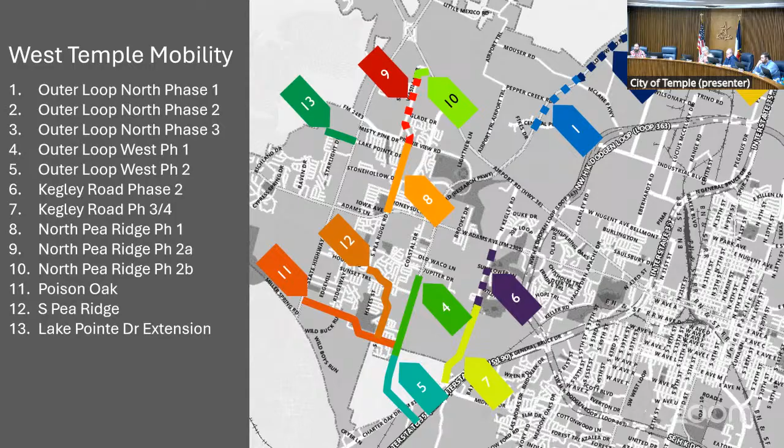There's a couple key ones I want to draw your attention to. Numbers 1, 2, and 3 up on the top right are your outer loop north—2 phases are complete and 1 is ongoing. We've got 2 parts of Poison Oak, that's number 11; 1 is complete, there's another one coming, so we're going to talk about those. Then future outer loop west on number 4 and 5 down to make that ultimate connection for the outer loop around the Dodgen Loop. This map gives you a good view of how that's going to function, giving you another option from 35 back to 35 when it's really congested.

So let's talk about the outer loop. This one has been a long time in the planning. The hiccup that happened with this is blamed on the railroads. Early on, it was going to be an at-grade crossing, but it changed to needing to be an overpass—for safety, they didn't want to have the vehicle and the train conflict. So it was recommended to change it to an overpass. They've done that, and as you see on the photo, the overpass is in progress.

These are photos that I borrowed liberally from our Public Works engineer's slides. So if you go out there right now, you're probably going to see more work complete than what I'm showing you here. They are moving.

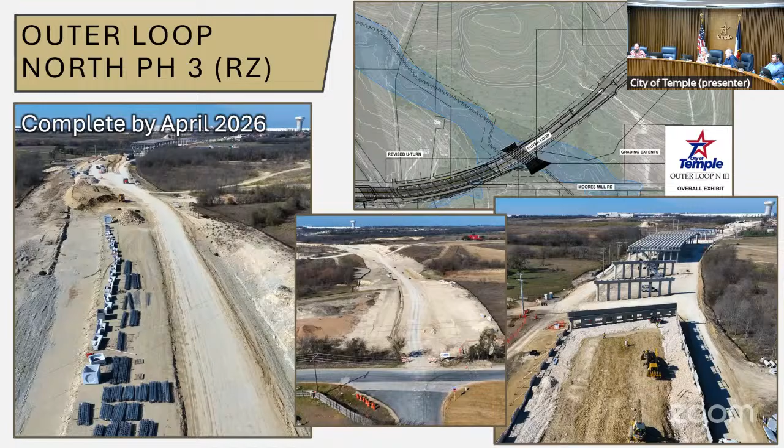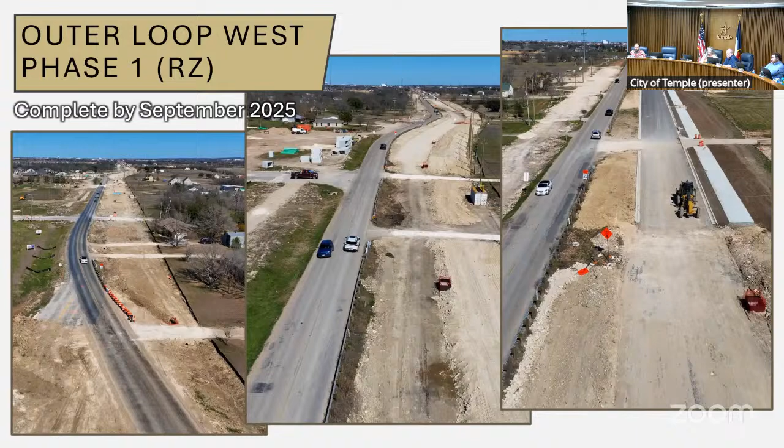Outer Loop West Phase 1, this was a grant that we got through the Killeen-Temple MPO. It's funded, and as the engineers like to say, they're blowing and going. This will be complete by September of this year. There is a second phase that will make the ultimate connection to I-35, and we'll cover that at the end because it's quite a ways out for now. But if you're familiar with part of Old Waco Road by Walmart and QuikTrip, it's the same cross section.

Kegley Road, everyone's favorite project, mostly Commissioner Rhodes' favorite. The new bridge you see there, as well as grading to expand that roadway to allow that future 3-lane, similar to the completed phase up closer to Adams, using that 3-lane center turn lane with the sidewalk on one side, marching their way to the south. It'll tie into Midway and Charter Oak, and we're promised it's complete by November. If it changes, don't blame me, because I don't dig or drive bulldozers, but that's the date they are showing right now.

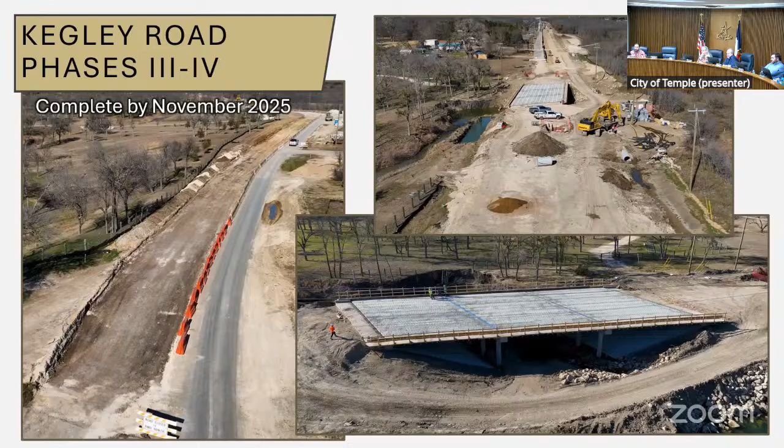Another bridge, the 24th Street overpass. If you listened to the last council, Rucker Preston is the director of Family Promise, and this is their facility right here on the corner of 24th and Avenue N. This was a pedestrian project, but once they started looking at the bridge, they recognized the need for improvements on the bridge itself. You see that inset photo where they're working underneath the bridge. So there was a great opportunity to combine two necessary improvements. They're moving along, and that should be done this spring. May 25 is what they're showing.

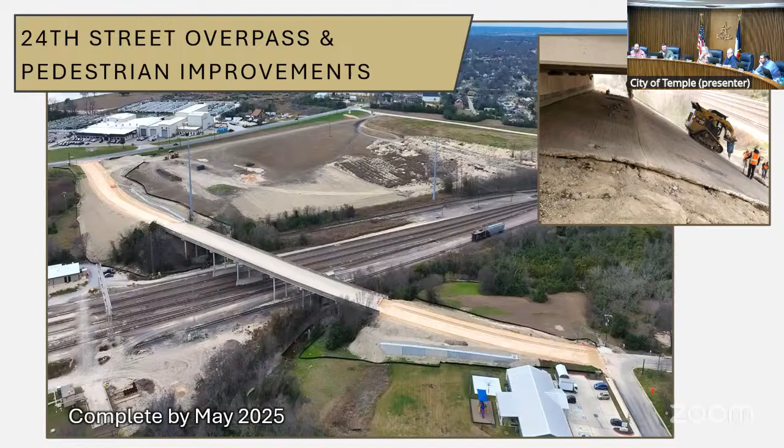Veterans Memorial Boulevard, this is First Street down there by the VA complex. You're going to hear a theme: extending the same cross-section that's down by Temple College, we're moving forward with the same cross-section past the VA, moving north. So it's that divided landscape median boulevard, wider sidewalk on the side. If you're familiar with the VA, that's a necessary improvement for the pedestrians and veterans who are out there in an assisted mobility device, classic wheelchair, or just crutches and sticks trying to get around. This is much needed.

It also includes a drainage component, which is on the other side of Temple College. You see that inset there, that's the future regional detention area that'll feed into Friars Creek. This one is going through final review with TxDOT, looking at the designs and getting their blessing, because it is a TxDOT facility. It should go out to contract, out to bid by September. We've got some congressional money on this one, and there's a shot clock clicking away, so we're working on getting this one out the door very soon.

Then there are 2 more phases, from Avenue U, where that CEFCO is, going north, and then R to O. The first phase is just for the congressional money. Phase 2 and 3, we got some more money through the Killeen-Temple MPO to fund that work.

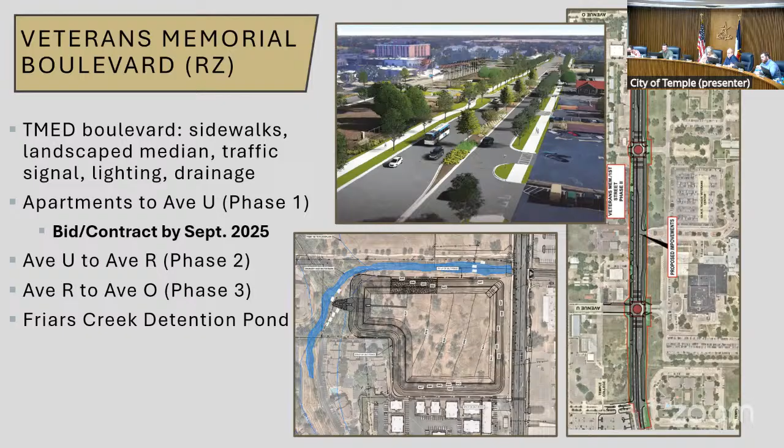The Georgetown Railroad Hike and Bike Trail Phase 1. The first thing you should know is that the developer for the Triangle Tract, that new townhome mixed-use office complex on the corner of 31st and where the railroad comes out near Deerfield, is working through a developer's participation agreement, cost sharing. They're building the trail next to their development because they're building their development right now. They want to see it done at the same time and not have the disruption once we start our work. That's great because it saves the grant money we got, which can be put towards a shorter piece of trail. So that's another one currently going through design review with TxDOT.

They're at the 90% designs. That includes a pedestrian crossing at 31st Street, getting folks across that 4-lane road for safety, with some flashers, some markings, and a raised median that'll create 2 turn lanes, both north and south, going into Deerfield and Bellaterra. So it'll end up serving two purposes: you'll have a pedestrian refuge in the middle where that raised median channelizes the traffic, and it also gives people a chance to pause, so they don't have to sprint across 150 feet of pavement in one go.

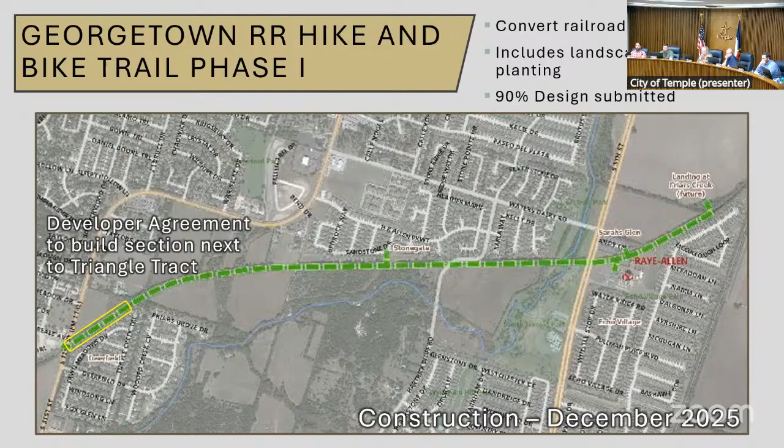We've got two roadway improvements that are a little bit further out. Hartrick Bluff Road has been coming for a while. They've been working to get the dry utilities relocated, all your electrical, telecoms, AT&T and Spectrum. There's also a traffic signal needed at the intersection of 93 and Hartrick Bluff. We've known that's needed for a long time, so that'll be part of this project. Should go out to bid in May.

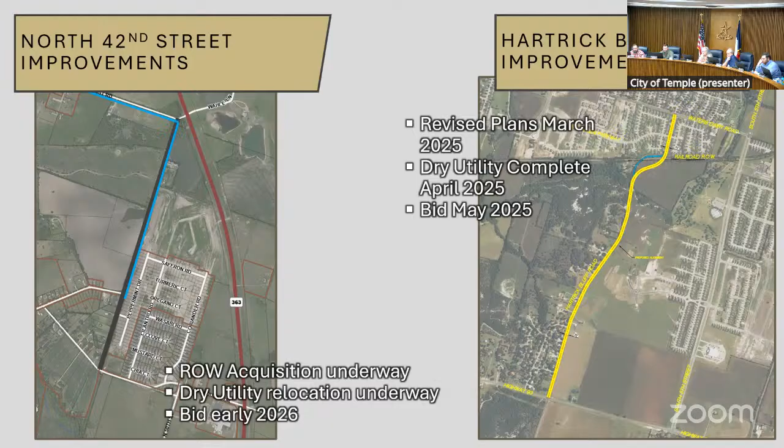Then North 42nd Street, there's 3 residential developments coming in there. You all saw one of these recently, French Hill on the west side. Oak Ridge, as you see there, one of their future phases, they're still working on that. And then North Creek just to the north with this long parcel. We're working on the right-of-way acquisition. Part of that is also the sewer infrastructure going in with that roadway as the two neighborhoods are built out, so there's some overlap to getting the right of way finalized. That should go out for bid to start construction early next year.

Moving back to downtown, we've got a project also on 3rd Street, the same TxDOT facility. We had to get what's called a LOSA, a local on-system agreement, for TxDOT to let us pay for all the work on their bridge. What we're doing there is taking one of the traveled lanes away, creating a wider pedestrian pathway.

You see the red is the overpass, the gray down here, improving that sidewalk, adding the crosswalks at the intersection, and then adding some landscaping on the south side, what used to be Pit Stop Barbecue. It's a much improved pedestrian connection between the neighborhood to the south, across the bridge, and into downtown. If you've been around long enough, there was a spot where the sidewalk would stop and there'd be a stretch of grass. We're going to get that fixed.

That is anticipated to start 2025. Like I said, we had to coordinate with TxDOT to get that letter of agreement in place, and we're waiting on the permit from the railroad. They again have control of their airspace, so even though all we're doing is widening the street and putting in wire pedestrian barriers, they still need to give us a permit to do the work above the tracks. So pending BNSF approval, that project will move forward sometime, let's just say soon.

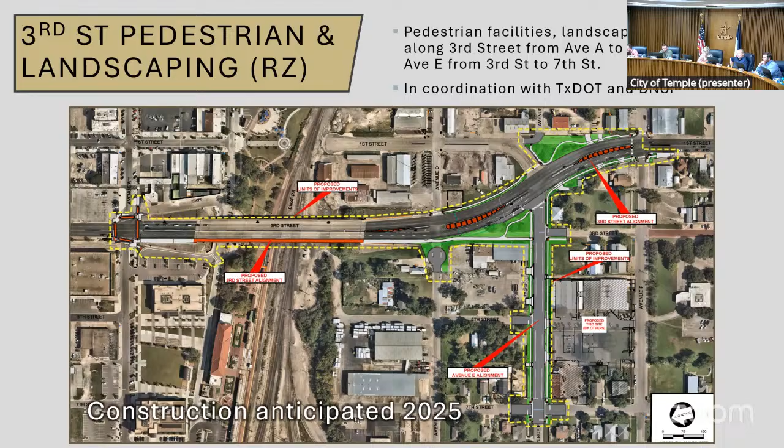Moving north on 3rd Street, this came out of the neighborhood planning process, and they're working on adding sidewalks on 1st Street by Lamar Middle School, connecting to Miller Park where the pond and the walking trails are, and then adding another little trail that will kind of connect over to 3rd Street and head north, with the idea of a future connection to the Cultural Activities Center and the Mayborn Center. So that's another one, they're working through the designs on that. That's funded through the city.

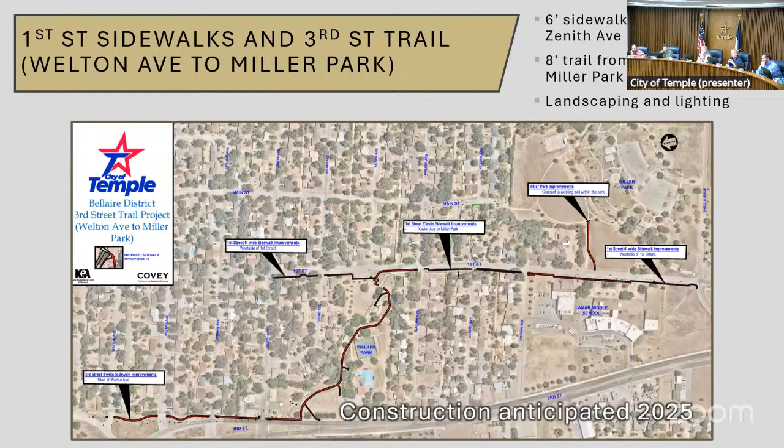Once they get the designs finalized, they can move to bid. Right now, they've just given us an anticipated construction date of 2025, but not specific down to the month as of yet.

Poison Oak Road, this is the one we did a couple years ago, adding that divided median arterial when the new Charter Oak Elementary School came in. If you've driven that road as it is now, you know it's a bit of a slalom course. You have to come past the school and make 2 90-degree turns on what's been a narrow rural road for a long time. The project here will continue that wider arterial cross-section, smooth those curves out. We've acquired the right-of-way between those 2 neighborhoods, and then it's just going to go right across to Old Waco Road, tying in with that future outer loop I showed you earlier.

That one they're anticipating to go out to bid this year. Again, they haven't given a specific date yet. It's also worth noting there's a large electric overhead transmission line through there, so they also have to work with Oncor to get the plans approved for what's going underneath the power lines.

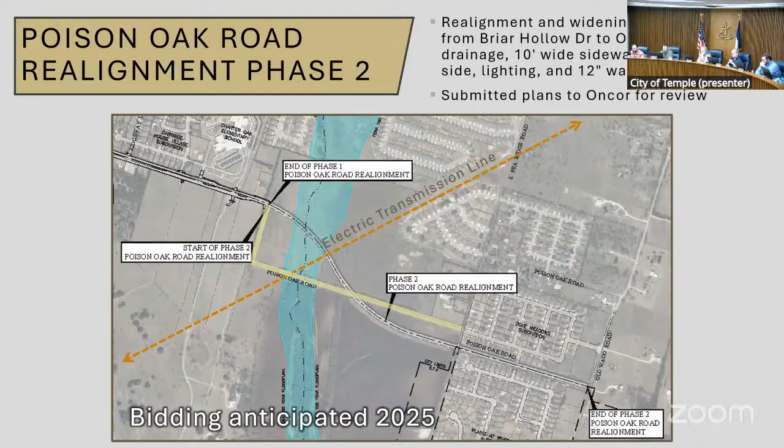Avenue C, this one is funded for FY28, so it's a couple years out. But this was another kind of overlap facilitation conversation we had between Public Works Engineering, our neighborhood planning process, and the members of the congregation for the 8th Street Baptist Church. As we widen that street, it's going to change their parking.

We sat down and had a great conversation with them about what their needs truly are, the impacts of the project, the costs and benefits. There are both. How can we minimize the disruption in such a way that when the project's complete, they've got better access to the church, both from the front and side, and that rear parking lot. So you see that one also has a wider sidewalk that meanders along the south side of Avenue C.

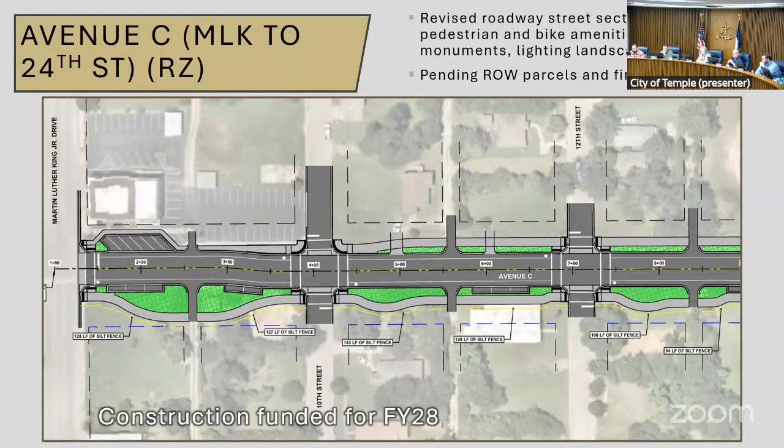Both sides of Avenue C with some landscaping, and it widens that section as well.

So the future Outer Loop West Phase 2 is funded through the reinvestment zone. They're working on the right-of-way acquisition, those purple parcels you see in the inset on the right.

Their preferred alternative that they're working towards is that green alignment. It hits that pinch point where the current Charter Oak Drive goes underneath the overpass, underneath the railroad, so you're going to have a 3-layer overpass at that point.

But that really made the most sense. If you're going to build bridges, build one. If you chose one of the other alternatives, you would build a couple of bridges.

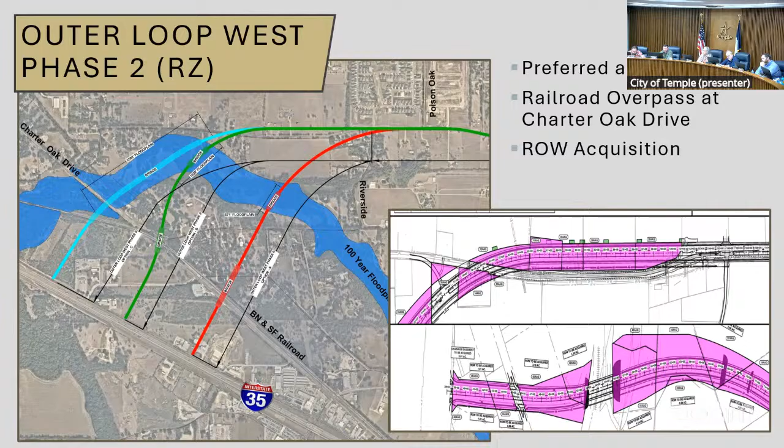And that'll come back down to I-35 right there by Twin Cities, until the right-of-way is complete and working on the permission with the railroad overpass. We don't have a firm date when that might start yet. That's going to be quite a few years out.

The last one I'll end with, we recently looked at this area for the Leon River Phase 1, which is on the consent agenda tonight. The preliminary plat came through a few months back, now we're at the final plat phase. There's a traffic impact analysis, a new residential development that you see on the inset, and a new elementary school for TISD.

So engineering is looking at both the roadway improvements and the necessary sewer lines that are going to be needed as we see more growth in this area. The roadway that you see, the developer is working on the designs for that.

They've received 30% design, so those are in review, and that one is planned for 2026. Next year, like I said, we just got the preliminary plat in for this one a couple weeks back, met with them for DRC, and we're recently waiting on some revisions.

So you may see this come to you in the near future for the preliminary plat, and then at some point the final plats will come in. So a lot going on south of 93, old 95.

Two things to note that I'll wrap up with are those two circles that say signalized intersection. There was a traffic impact analysis that was completed. The signal that comes in first is the one at old 95.

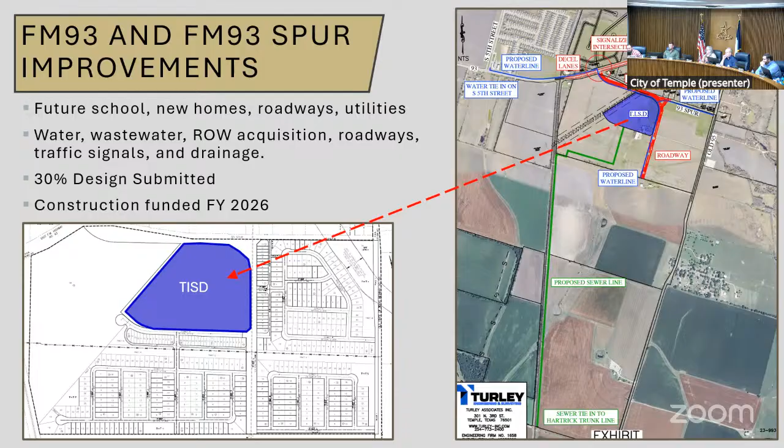They typically do not proactively add a signal. You don't change the traffic patterns until it's necessary, is what it boils down to. So a lot going on the south side of town with this project, and you'll see that again in the near future. With that, I'll take a breath, drink some water, and take any questions you may have.

That last one, the 55% build out, that's built, not sold, correct? Built, yeah. So once their permits approved, the home's built, certificate of occupancy. Yeah, Jason, we'll be tracking that, and so will TxDOT.

Is there a soft copy of that anywhere? Of the presentation? Yes, I'll save a PDF and we can send it out to y'all. Okay, because I'd like to study that a little bit more, but yeah, it's interesting. Sure, that's a good basis to go off of and to keep up with.

So that's interesting. And I'll say this, it's just like being a poker player, have more than you show. I selected out some real highlight projects. There's some other smaller things that maybe don't have as much of a citywide or regional impact as these projects do, so really wanted to hit the highlights. Very good.